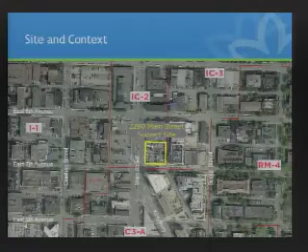The site is located in the Lower Main sub-area of Mount Pleasant. Under the Mount Pleasant Community Plan, Lower Main is envisioned to evolve from the existing light industrial district to an urban community where there is a mix of commercial, office, and residential uses. The proposed zoning is consistent with this land use policy objective. So that's the proposed site.

Under the adopted community plan, it allows for consideration of additional height beyond 6 stories on sites at Main Street and East 2nd and East 7th. Noting height is a very sensitive issue for the Mount Pleasant community, the plan mandates that investigation of any additional height above 6 stories shall demonstrate how the additional height serves to improve street character and to provide public benefits without compromising the Hilltown urban design concept, important public views, and sun access to the street. It is under this provision, these directions of the community plan, that staff took in this rezoning application.

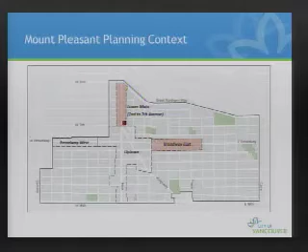Yesterday, Council received the Mount Pleasant Community Plan implementation report and approved the implementation package. In the implementation package, the Lower Main Urban Design Framework is of particular relevance to this site. The framework limits heights to 6 stories on the 3 blocks between 2nd and 3rd, and between 3rd and 6th Avenues. Heights up to 11 to 12 stories are anticipated on Main Street between 2nd and 3rd Avenue, and up to 9 stories at the northeast corner of Main and 7th Avenue.

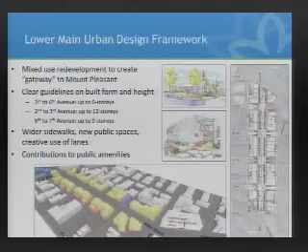The subject site is one of the key sites in the Lower Main transformation. It transitions from the higher and bulkier buildings along Kingsway to the generally lower scale development along Main Street. Because of its location at the junction of the shifting city street grid, it offers a unique opportunity for a building to respond to different street conditions.

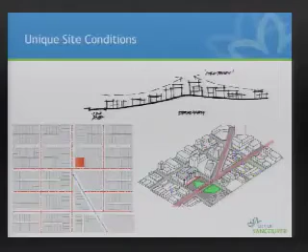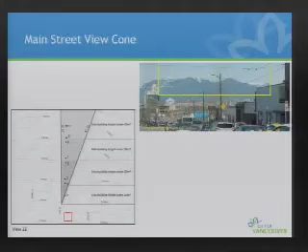The site is outside the Main Street view cone, which starts below the site at East 7th Avenue. So that's the starting point of the view cone, that's our subject site, at 6th Avenue, sorry. For this reason, staff support the investigation of additional height at this site through a rigorous urban design exercise.

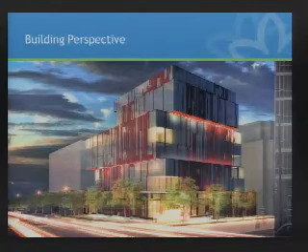The proposed building by Arno Matis Architecture presents itself as a 9-story building along Main Street, with the top 3 floors highly sculpted to provide large setbacks. If approved, the building will have a height of 98.5 feet, consistent with the Lower Main Urban Design Framework. It has a proposed density of 4.92 FSR. Commercial uses are proposed along grade facing Main Street, as well as wrapping around the corner and continuing along East 7th Avenue.

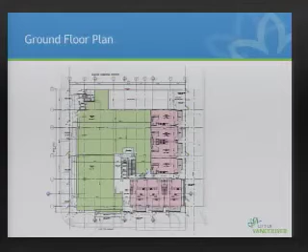3 townhouses are also proposed along East 7th Avenue, here. Along the lane, there are 4 residential units to animate the lane environment, which is one of the key policy objectives of the community plan. I will note that due to the sloping of the site, there is a partial mezzanine floor contained in the ground floor volume, which technically constitutes an additional floor in the southeast corner of the development, as highlighted here.

Staff support the inclusion of this mezzanine level because, first of all, it is a result of the sloping of the site and the need to accommodate the essential ceiling height for the retail space. The height of the ground floor is consistent with a functional floor to ceiling height at the highest point of the site for the retail.

Second, the mezzanine also allows the inclusion of townhouses along East 7th Avenue, introducing more housing varieties offered by this project, suitable for families and helping to animate the street. I would also note that in review of this proposal with the MPIC, the Mount Pleasant Implementation Committee, there was a strong desire to include townhouses in the development.

Overall, staff are satisfied that the building reads substantially as a 9-story building from all fronts, so that it meets the intent of the Lower Main urban design framework.

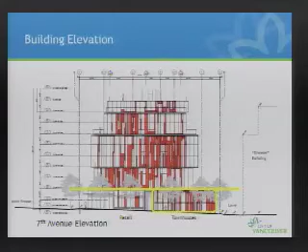In terms of neighborly impact, the proposal includes various setbacks from the property edges from the 2nd floor and up, with significant setbacks at the top 3 floors, as shown in the diagram here. This approach to massing not only helps mitigate shadow and overlook impact on neighboring buildings, but also sculpts the building to maximize preservation of private views from neighboring sites.

On this diagram, for example, the building is set back a minimum of 25 feet from the lane edge from the 2nd floor and up, to make up for the zero lot line condition across the lane.

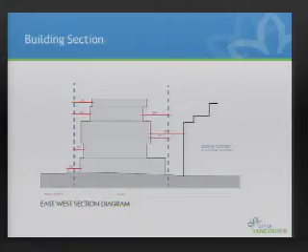To summarize on design and built form, staff have concluded that this proposal has skillfully addressed the unique transitional nature of the site and has respected the Hilltown urban design concept. The proposal includes design strategies to effectively mitigate its neighborly impact, and with the design development conditions recommended by staff, contained in Appendix B, the proposal will further improve its interface with adjacent sites.

I will now briefly discuss the rezoning process itself and the public consultation. As I stated earlier, the application was taken in under the directions of the Mount Pleasant Community Plan and assessed against those directions. Staff made a conscious decision to take in this application, noting that there was a concurrent implementation process to provide more clarity on built form in Lower Main.

The applicant has participated in the community consultation process for the plan implementation, including meetings with the MPIC twice to receive their input, one during early inquiry stage and one after the application was made. Staff also benefited from the review of this real-life project in terms of proposed form of development, height, and density, which helped inform staff's built form analysis along Lower Main.

So the implementation work and the review of the subject rezoning have been two parallel processes, each informing each other with lots of community input. The public consultation after the application was received included a community open house and online comment sheets.

Over 100 written responses were received as a result. Approximately half were in support and half were against the project. Staff also received a petition opposing the development from 27 individuals, many of whom lived in the district building across the lane from the subject site. Overall, the main concern staff heard was the proposed height, with many people saying it should not exceed 6 stories.

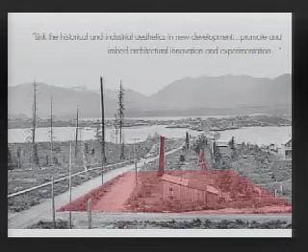The next snapshot is settlement time. This is our site at the corner of 7th and Main. There's a building on the site, I believe it's a brewery. It's the first known building that existed on this site, and the planking on the building itself provided some additional inspiration for our project.

Lastly, this much later in time, even though it's a black and white image, is a photograph of our client standing in front of JJ Bean Coffee at 29th and Main. They purchased this business as refugees from Uganda in 1973, transformed it into an international company and became quite successful. It's an exciting story, one we'd like to see repeat itself on Main Street, and they've come back to do this project partly as a legacy project.

So a little bit about the context. There's been a lot of discussion about stories. What we've done here is an axonometric of the context. This project doesn't exist yet, but it's approved. These elevations are survey data—geodetic elevations, not actual building heights, but heights from a geodetic datum. Number 1 Kingsway is 213.7, the Social is 204.2, and the District is 200.6. These are important elevations we'll refer to when we get to the site profile.

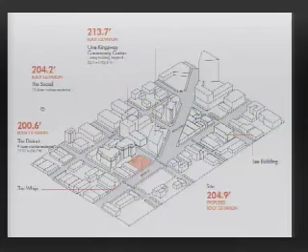Next slide, please. You've all seen this diagram—we're all familiar with it. It's a diagram we wanted to respect and adhere to quite closely: the notion of a hilltop profile to Mount Pleasant, with the apex being at Broadway.

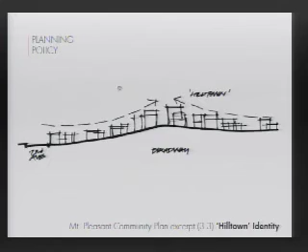Next, I won't go through all of these images—they're diagrams relating to the Mount Pleasant plan. The main one I want to talk about is in the top corner, which addresses enhancing pedestrian access down the lane, and also improving public realm along Main Street.

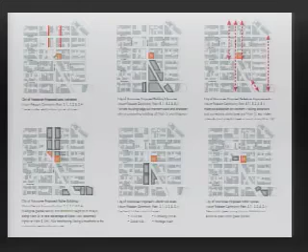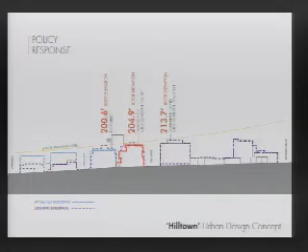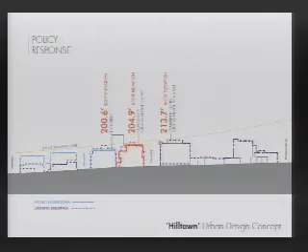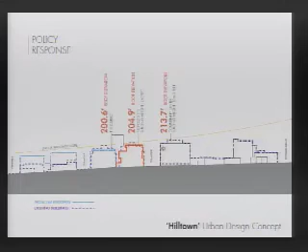Next slide, please. This is our outline of our proposal. This is 1 Kingsway, and this is the roof height of the District. You can see there's a gradual increase in height. We've been careful to keep our roof height about 9 to 9.5 feet below 1 Kingsway, just slightly above the District. Our proposed roof height is almost exactly the same as the Social, which exists kitty-corner on 7th Avenue.

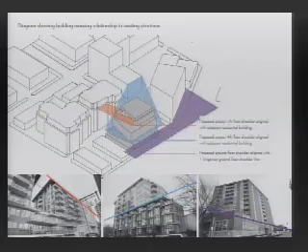To articulate the massing, we drew references from adjacent structures for the podium. We took a datum line that informs our first step back along Main Street. For the next shoulder at level 4, we took the podium line at the corner of 7th Avenue and the lane from the Social—you see that in blue. Then at the upper story, we took the shoulder line at the District to inform a step at the upper level of our proposal.

Furthermore, we've stepped the building on all four sides. This layered diagram on the right shows the different floors as they step back. This is the north face of the building, with Main Street and 7th Avenue here. You can see the building steps back considerably on the lane side, very dramatically across the north facade, with a strong shoulder on Main Street at the 6th floor line.

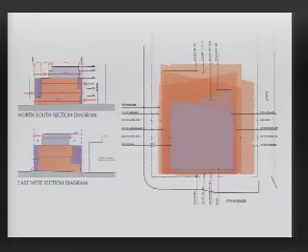This diagram goes through various floor levels, showing how the floor plates diminish in size as the building rises. These are view cones—views out from the adjacent District building as well as views from behind. We've tried hard, by cutting tapers into the building facade on the north side, to improve those views even further. So it's a combination of reducing floor plate size and introducing geometry to improve views.

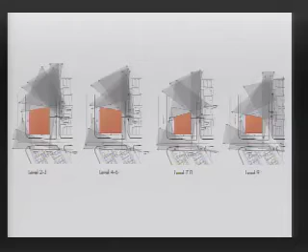That geometry is what gives the building its unique character. The combination of the stepping and the cuts creates this very interesting stepping on the north edge of the building.

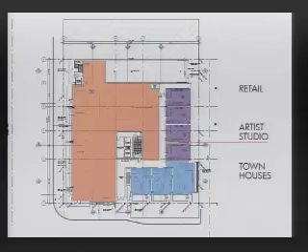You've already heard a little about the ground plane. All I'll add to what planning has mentioned is that there are significant setbacks along Main Street—we set our building edge back from the property line at least 9 feet. That permits a sidewalk of about 18 feet with street trees and planting that don't currently exist there. We've also set back artist studios along the lane, allowing for landscaping there, which is highly desired per the Mount Pleasant plan. And along 7th Avenue, the townhouses are set back considerably as well. So the building pulls back on 3 sides at the ground plane, permitting significant landscaping along the street edges.

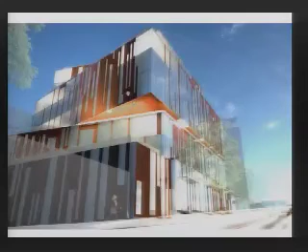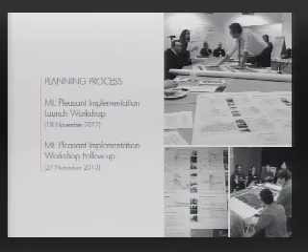As planning already mentioned, we went through an extensive process. We participated in 2 implementation plan workshop sessions, 2 meetings with MPIC, an open house, and an urban design panel meeting.

The project has significant public benefits, including over $4 million in direct cash payments. We would also include the public space improvements through large setbacks on Main Street, on the lane, and even on 7th Avenue as public benefits. Lastly, innovative architecture, I think, may be included as part of that.

Finally, the facade system has gotten some attention through blogs. It's been featured in World Architecture News, Inhabitat, and a number of other blogs. Even now, it's still gaining quite a bit of interest and attention. That's the end of my presentation.